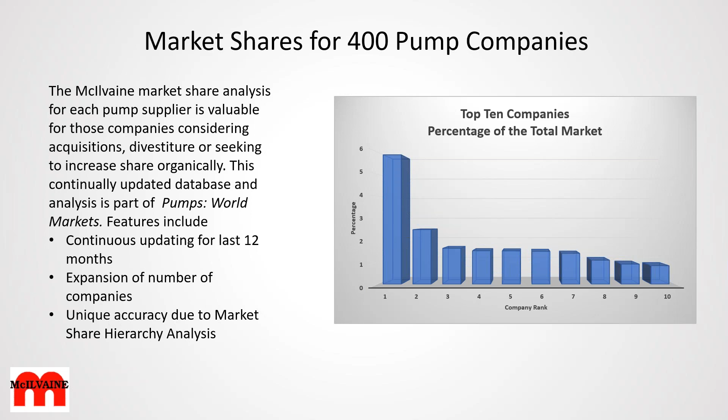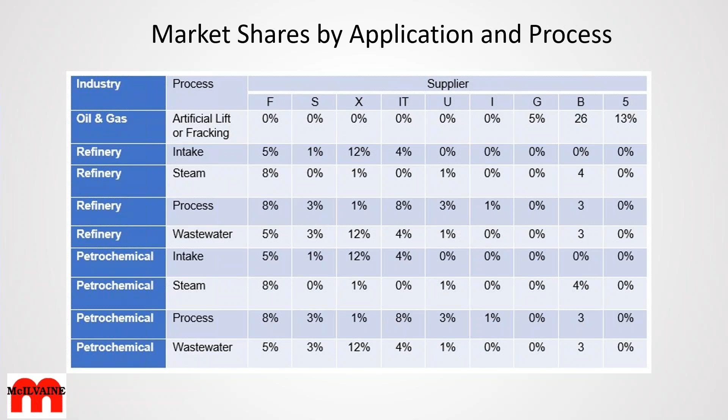For intake water, it's pretty much the same whether it's in any different industry. The water is the water that you're extracting from a stream or lake or whatever, and therefore the market shares are going to be more meaningful if they're related to the process rather than to the industry. Steam is another example, as is cooling, where the process is more important actually than the industry itself.

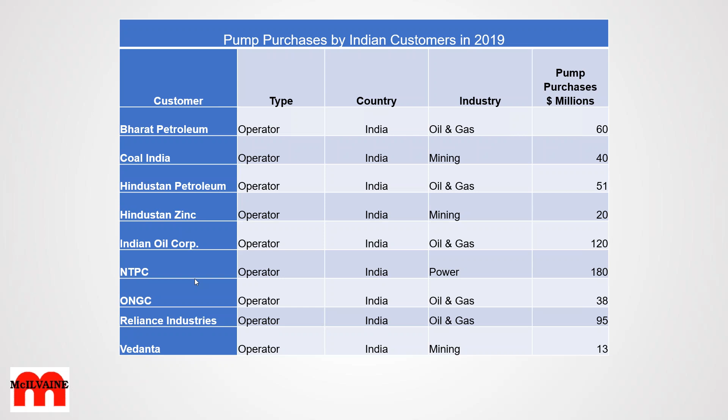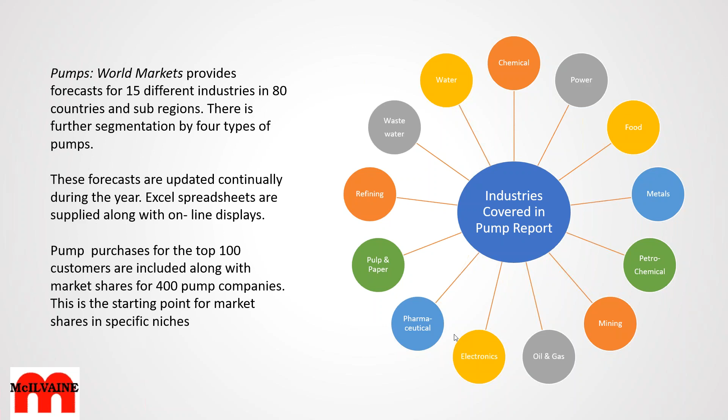And this is the starting point for more specific niches. And here are the main industries covered, so that we are covering, for instance, the food industry as one industry in the report. But then we have potential segmentation into each segment of food. And so you would have breweries versus sugar versus edible oils. But even within edible oils, we have further segmentation.

We have production for palm oil, rapeseed oil, sunflower oil, and so forth in each country. And we do the same thing in cane sugar and beet sugar. And it's worthwhile making these segmentations. For instance, with cane sugar, they're also generally burning bagasse for power. So you have a whole new process where valves are required.

The chemical industry has many different processes and generally can be divided into a couple subsegments and then sub-subsegments of 5 or more each. But there are actually hundreds of niche applications, some within the same plant. So if you're making chlorine, like Dow Chemical, you may be also using that chlorine in downstream processes.

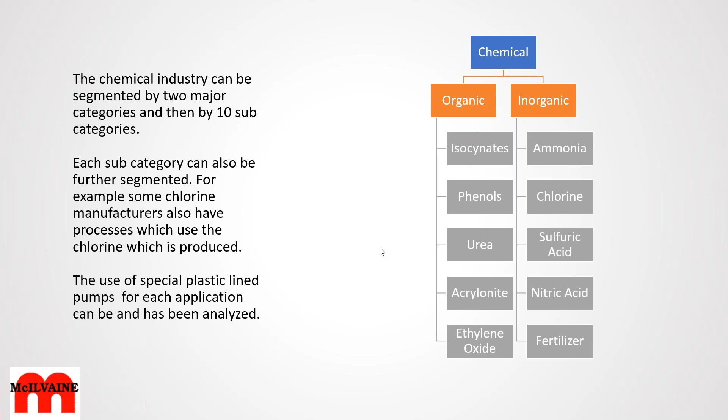And so there would be a series of different valve applications in that one plant, and they would all use plastic lined pumps of a special design. So there's really only a handful, maybe 10 or 20 suppliers competing for that particular business, and each aspect of the chemical industry has its own unique requirements.

The largest use of pumps in the power industry is for coal-fired boilers, followed by gas turbines and nuclear, and then biomass. There's some in geothermal and hydro.

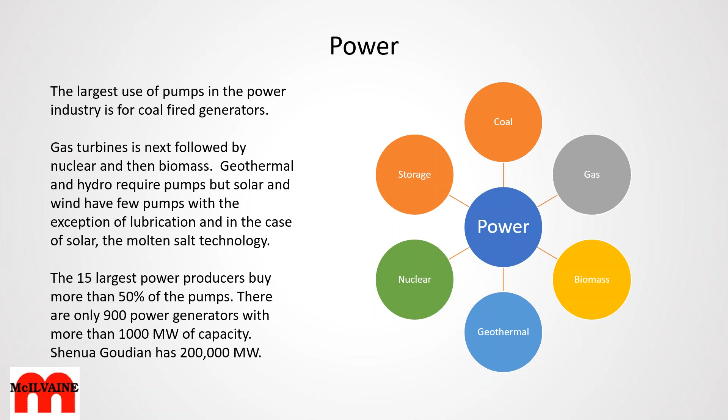The 15 largest power producers account for more than 50% of the pumps. There are only 900 power generators with more than 1,000 megawatts of coal-fired power capacity. Of them, Shenhua Guodian has 200,000 megawatts, or nearly 10% of all the world's coal-fired power production. So it's a very concentrated market.

The market share hierarchy is unique, but requires knowledge of all the processes and the industries, and therefore is not that easy to come by.

But let's take FGD as an example. If you're going to determine the market share for the KSB or Trillium FGD recycle pumps, you really have to start with how much of GDP is going to power, how much of that power will be fossil fired, how much of the fossil fired will be coal, whether or not SO2 removal will be required. If so, will it be wet or dry? If it's wet, will it be limestone, which uses more pumps than does lime? And even with the absorber type, a spray tower can use twice as much slurry as does a tray tower for the same results.

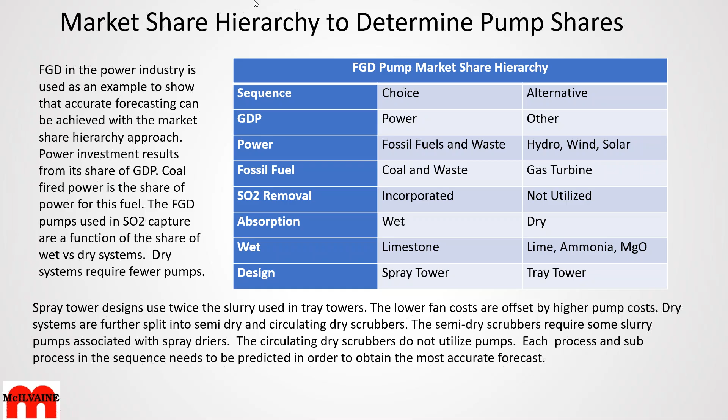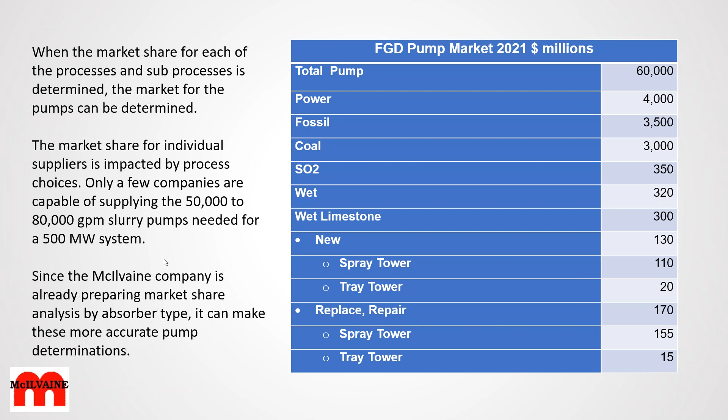And presently, there's a much bigger market actually in replace and repair of these big FGD recycle pumps than there is in the new, because it is highly abrasive and corrosive. And there's 2 million megawatts of capacity out there now, and only about 30 or 40,000 megawatts of new capacity a year.

And you can then go through the details of the process itself and what is the absorber recycle pump, and why with a spray tower you're going to have only a few suppliers that can supply those large 50 to 80,000 GPM pumps, but with a tray tower, a large number of pump companies can compete.

And then whether you've got ball mills for grinding or dry mills for grinding makes a lot of difference in the pumps for calcium slurry. And then even the oxidation process, if the end product is a soupy natural oxidation, you're going to need reciprocating pumps, whereas if it's forced oxidation and gypsum, you can get by with centrifugal pumps and a much lower investment for the pumps.

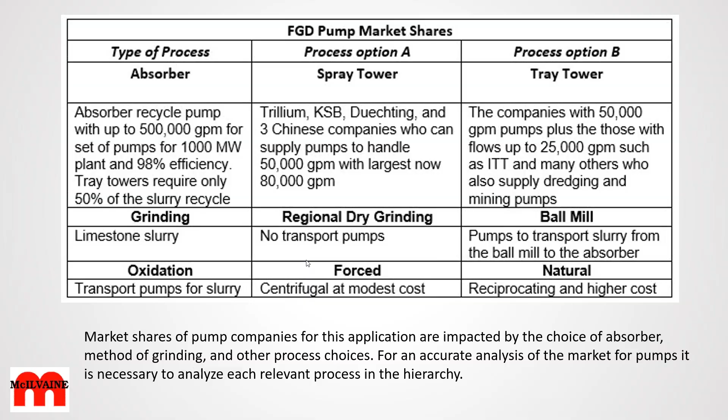The metals industry has got a number of different applications. The Pumps World Market provides a listing of all the NAICS codes and even names the US and European plants in each of those categories.

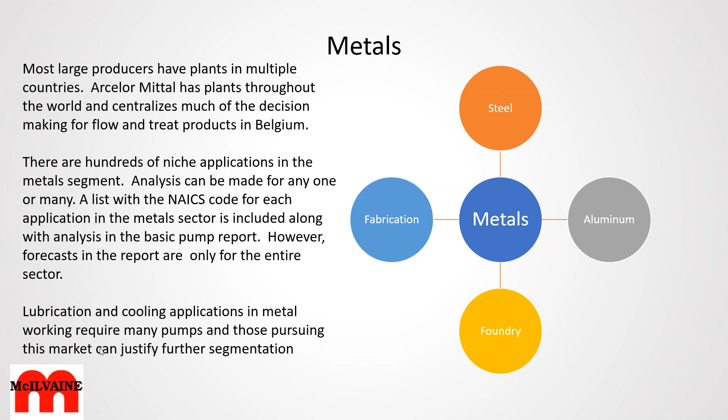One of the large applications is cooling, and 83 companies, for instance, make gear pumps, much of it used in this application. And here is an example of the market shares for some of those 83 companies for the external gear pump opportunity.

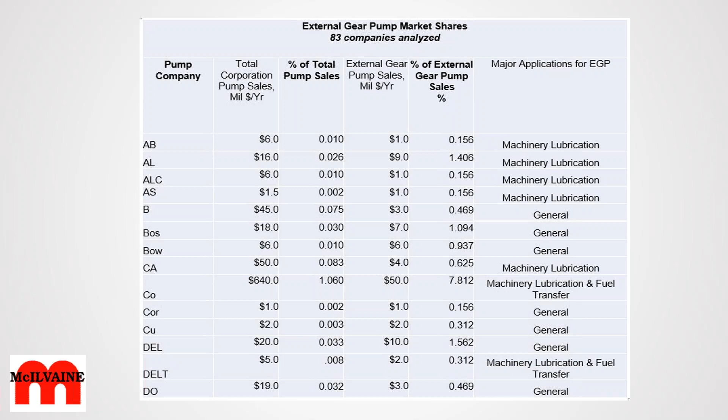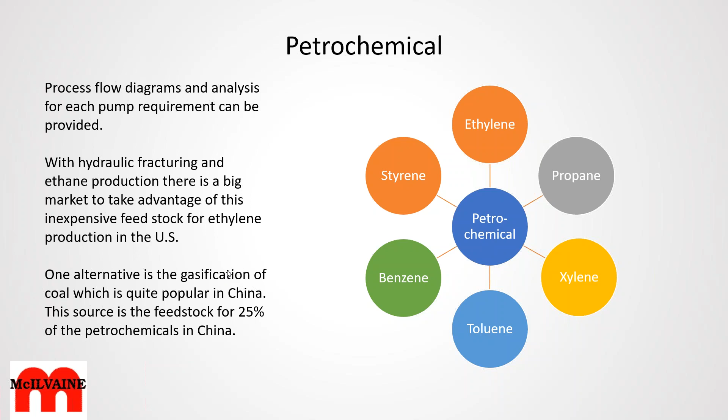The petrochemical industry is booming now, and a lot of new activity due to hydraulic fracturing and ethane production in the Marcellus region in Pennsylvania, and it's an inexpensive feedstock for ethylene. And another application is the gasification of coal for petrochemicals, which is quite popular in China and is the source of about 25% of the petrochemicals in China.

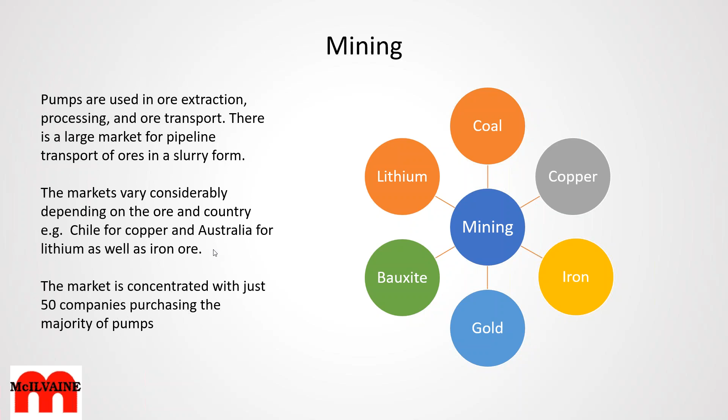Mining applications include the ore extraction, processing, and ore transport. There's a large market for pipeline transport of ores in a slurry form, primarily using centrifugal pumps. The markets vary considerably depending on the ore and the country. For instance, Chile is a large portion of the world's copper is mined there. And Australia is a large producer of lithium as well as iron ore. The market is concentrated with just 50 companies purchasing the majority of the pumps.

Oil and gas is a very big market for pumps, and it warrants segmentation and even sub-segmentation. LNG can be segmented, for instance, into liquefaction, transport aboard ships, and then regasification. Special analyses are available for hydraulic fracturing, which grinds up pumps on a weekly basis and is a huge cost in pump replacement and repairs. Subsea pumps have high pressure and other unique requirements.

Coal to chemicals is a growing market in Asia, and direct liquefaction uses large and expensive slurry pumps in the purification of hydrogenated slurry. So there are many, gas to liquids is a big application. And then of course you've got refining, and even frac sands is an offshoot of the oil and gas industry these days.

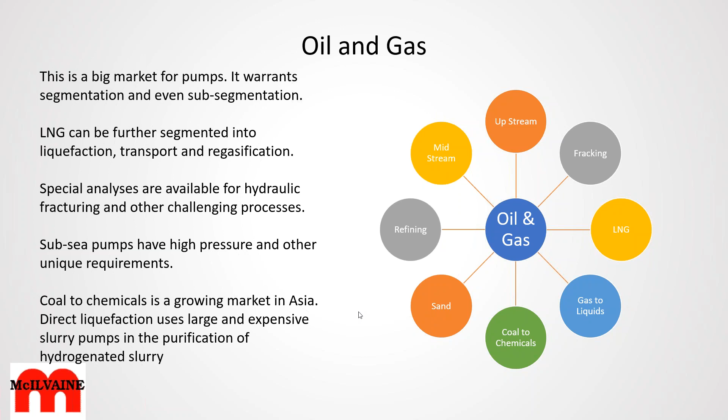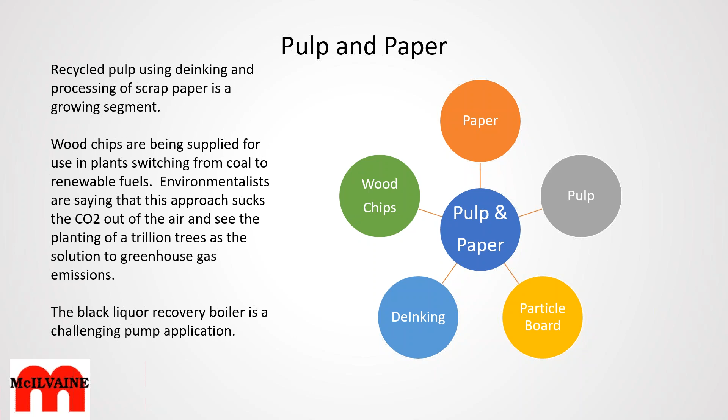Pulp and paper involves both the recycled paper, which involves de-inking of processing of scrap paper. But another application is wood chips, and this could be growing because of the potential to plant 1 trillion trees and suck CO2 out of the air. But when those trees die, you have to be able to have a way that CO2 doesn't get back into the atmosphere, and that's with combustion and sequestration. Black liquor recovery boiler is another challenging pump application.

Pharmaceuticals can be split into biopharm and others, and gene therapy is growing at double-digit rates, and there's some unique pump requirements for the closed systems to allow safe transfer from one process to the other.

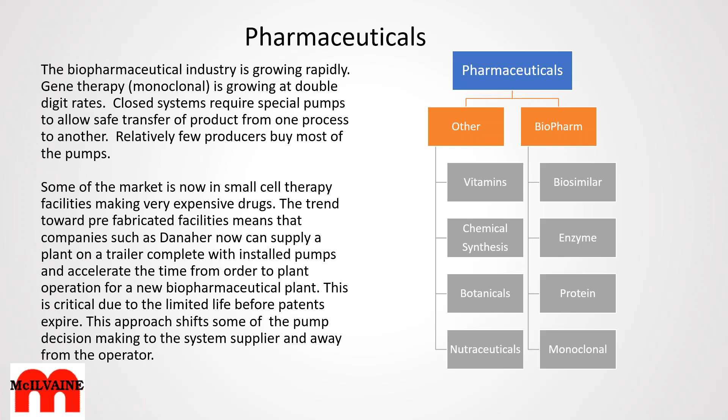The small cell therapy facilities making very expensive drugs dictate prefabricated facilities, and companies such as Danaher can now supply a plant on a trailer complete with installed pumps and accelerated the time from order to plant operation for a new biopharmaceutical plant. This is critical due to the limited life before patents expire. This approach shifts some of the pump decision-making to the system supplier and away from the operator.

Thank you for spending the time to discuss the market share analysis for pumps.